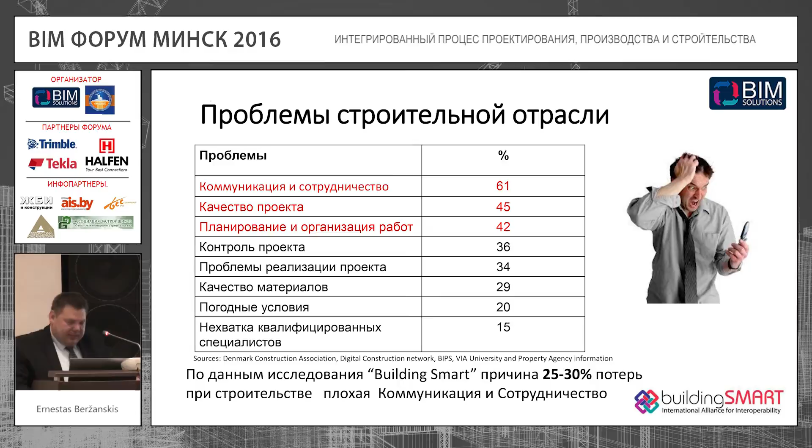If I had more time, I would give you specific examples from our Lithuanian projects. But feel free to think about your own projects when I'm referring to Lithuanian ones - they're not that far apart. So it's about integration of all the projects.

These are the stages we can describe. It's not all over the place, and it's not all over the countries. We're talking about conceptual design, we're talking about design development. So I would like to say this is more or less in line with the Belarusian architectural design, right?

Why is it architectural design? What - no structural engineers work there? They do, and there's a confusing name for it. Electricians, engineers, the heating guys, the MEP engineers - everybody's involved.

In some other methodologies, the next stage is production, or typically a construction phase, according to Belarusian norms - if I'm wrong here, please correct me, I might not know all the details. So it's the construction project, and in parallel we have these gray areas: construction and fabrication, preparation, construction plus fabrication, and we were supposed to start there physically, to start fabrication.

Manufacturing comes hand in hand with the construction process. If you only focus on manufacturing, then I strongly doubt your projects will succeed in terms of planning. We cannot just plan construction works separately without paying attention to the plan of production, fabrication, and delivery logistics. This is all very tightly intertwined, and linking all this together is the key success factor.

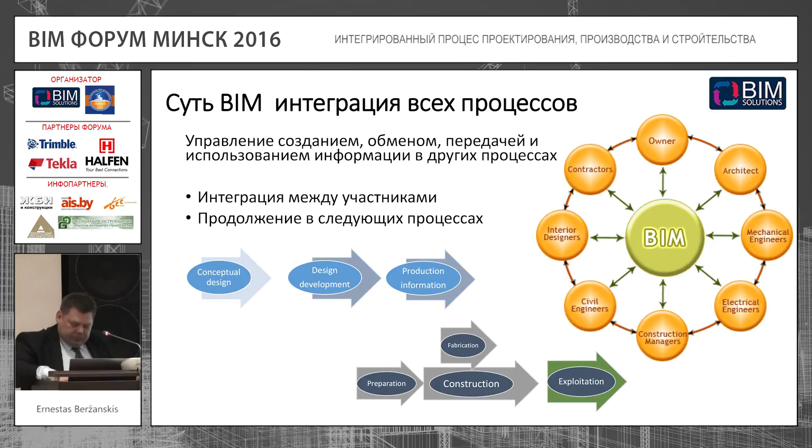This circle, it's like a spiral. It's spiraling throughout this entire process. This is what BIM is about - it's integration between the stakeholders, between the participants of the projects, and further down the process. So this is where we find ourselves.

There are several practical examples we can refer to, both in Latvia, Lithuania, and abroad. I am very much for studying from other people's mistakes, but not our own mistakes. But there are companies in Lithuania that choose to learn from their own mistakes. These lessons are very painful, but very precious at the same time - you will never forget the bad mistake you've made in a long while.

BIM will be successful when there will be architecture around it, and all the engineers, all types of engineers, will be streamlined and working in an integrated environment. BIM is about simultaneous streamlining of workflows. Who is using BIM in more than one design phase? Architectural phase, design - people are using that.

Do you agree that BIM is about streamlining the processes? Yes, you agree. Okay, and what about you? You also agree, right? So that's the definition of BIM in that regard.

First of all, BIM is about saving time, just because we start several processes simultaneously. It's more streamlining, better optimization. Another thing we're aiming at is working in an integrated environment.

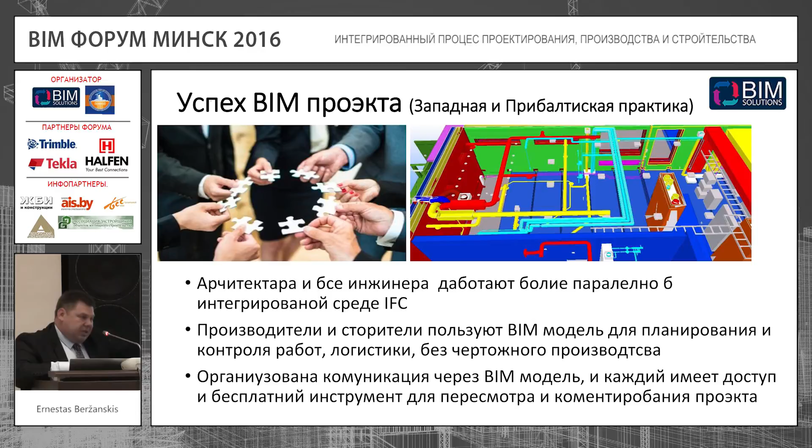We have this major metal structures factory, completely robotized, completely automated. We are considering the stages, how it's all supposed to come together. It's not just about geometry, it's also about the stages. They are sorting the materials, hand-picking the materials for every particular project. Mick will be talking about automation of metal engineering and metal production, and I believe you will be interested in that.

So what else do we talk about when we talk about BIM? The bicycle has already been invented, it's just about upgrading it further, making it even better. The documentation is available in English so far, but I've shown you some standards you can use to bring order to your documentation. Some of you may already know these standards. I will not go into too much detail, it's not a BIM management session. We're talking about manufacturing, but let me draw your attention to some standards used worldwide to streamline work.

One standard I'd like to note is the IFC standard, IFC format, and BCF, BIM Collaboration Format - another standard, this is a new thing. In Europe it's already part of ISO standard, it is now the official standard for BIM. I believe you know what DWG is - DWG is the drawing format. BIM files are IFC files, used to facilitate the exchange of data between various stakeholders in the project or between projects.

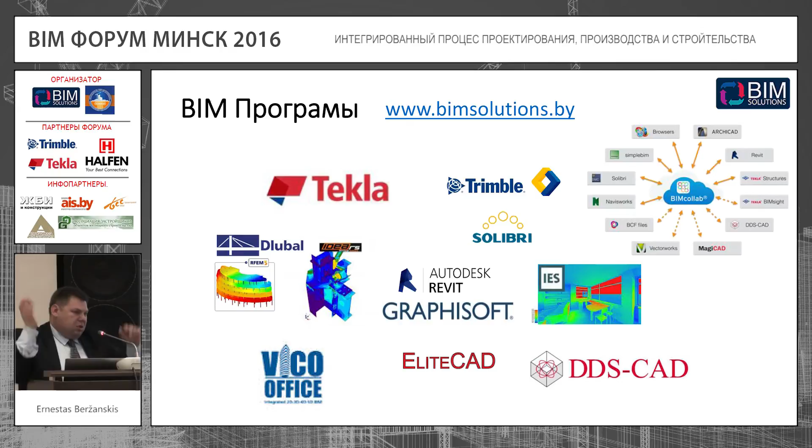We'll introduce you to another condition - this will be Trimble Connect, another presentation, quite a fresh solution. In this case, in technological sense, I believe it's a very advanced solution. So let's move on.

BIM for construction, for construction purposes. Now there are a lot of technologies in the world. We've been debating, discussing - people know what Oracle Primavera is, so it's a good thing. You guys know things because you've wondered about things. I can come up with another RIB iTWO system from Germany for that purpose, to manage construction projects.

This is the biggest general contractors' technology. What I meant by what I just said is that this technology is not used by absolutely everyone so far.

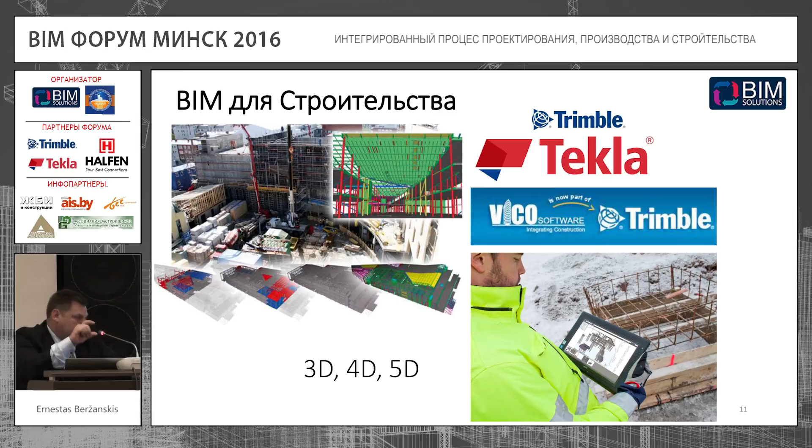4D. What is 4D? It's your 3D model in time, the fourth dimension. So you've modeled this construction site, but it's a living thing. It changes over time, and the construction situation can change. These structural elements, these columns, these pillars you use are living parts of a living organism. So you see that a 4D model can help you check statuses and check quality using that data. The fourth dimension is time, the fifth dimension is cost.

This is the terminology I'm going to use, so please, for those who didn't know, please know what 4D and 5D is about.

This starts from conceptual design, going further to a construction project. It's not exactly a construction project, it's a project understood by constructors. I've seen companies who manufacture this already in this form. This installation level is on the right.

Installation details means that you know at once by looking at it where each piece will fit, up to a single screw, up to a single bolt, up to a single piece. It's the manufacturing level.

So the information is produced, specified, adjusted, and it reaches this final level like I'm showing in this slide. The essence of conveying is about conveying information from stage to stage: detailing, planning the manufacturing, planning the construction, status control, and further along, quality control, and final documentation, or the executive BIM model. We call it the as-built model in English.

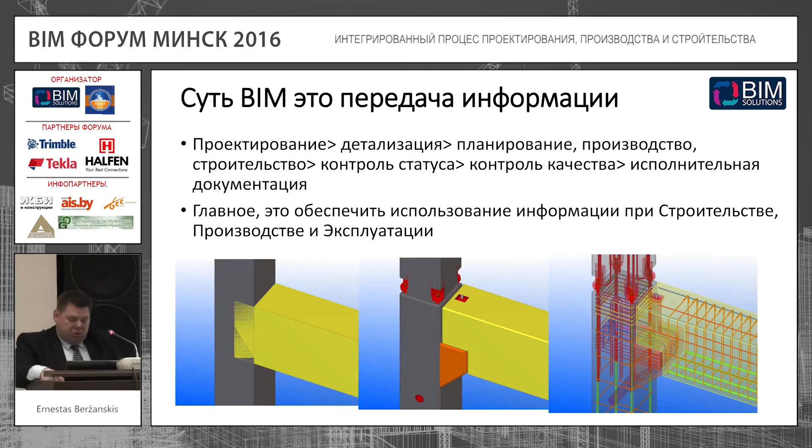So let's consider the construction model. It's much bigger, much wider than the structural model. In construction, we model the construction platform. It changes weekly, so the construction site changes over time. We use this fourth dimension to make sure that this living being is alive.

We're modeling not just these cranes, but also the landscape. We call it landscape in Russian, right? So it's about landscaping, about various pits that you need to excavate. In Scandinavia, there are other things that they design.

This wooden works, it's not exactly scaffolding—well, it's scaffolding, that's the proper name. In Scandinavia, they even model that, when temporary structures need to be built and what materials will be used for it. But the most important thing...

...is this tree of architectural elements, structural elements, engineering elements. You've seen this, right? Everybody working with BIM has already seen this tree. Even if you've worked with AutoCAD, you've seen this tree. But in the construction area, we're not happy with just that. We need more—we need additional criteria for every element in the construction logic.

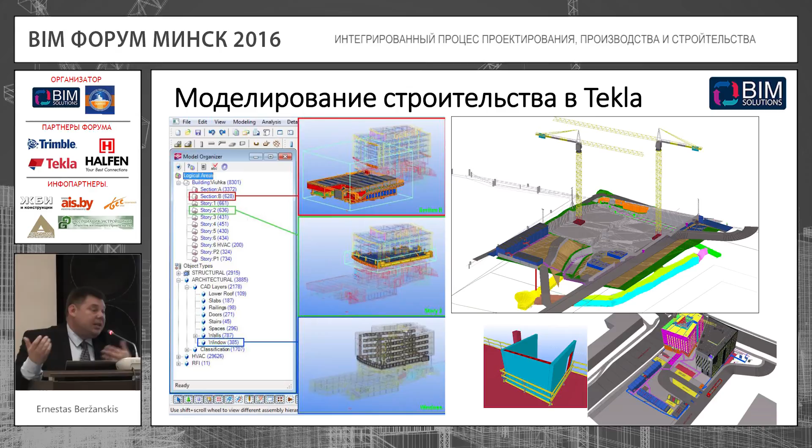What's important is status management. This visualization of layers makes no sense without management. There is a sequential nature of things - they need to come together, they need to be sequenced. We show a video to those who fail to understand the set of drawings. There are sometimes visual aids or visual instructions we have to give, and 4D models help us there.

So planning and control of 4D and 5D. We know that there are file managers, project managers, resource planners, people who manage the workforce. These people know about various levels of planning. Only two of these levels are shown here.

There is a level of very coarse or very rough planning, like this story will be completed by this time, that story by that time. So these are the flow line diagrams. I can show you around this methodology later on.

It's at the level of tasks, at the level of resources. The most important thing are tasks. It's about the foundation - for example, you need to build the foundation and balance the resources. Each of these lines is a task.

Who of you is working with Microsoft Project? One, two, three - so some people have worked with Microsoft Project. So this is the way it is described in Microsoft Project.

So the more inclined this line is, the more sloped it is, the longer it takes to complete it. And the more upright this line on the chart is, the shorter time span it takes to complete it.

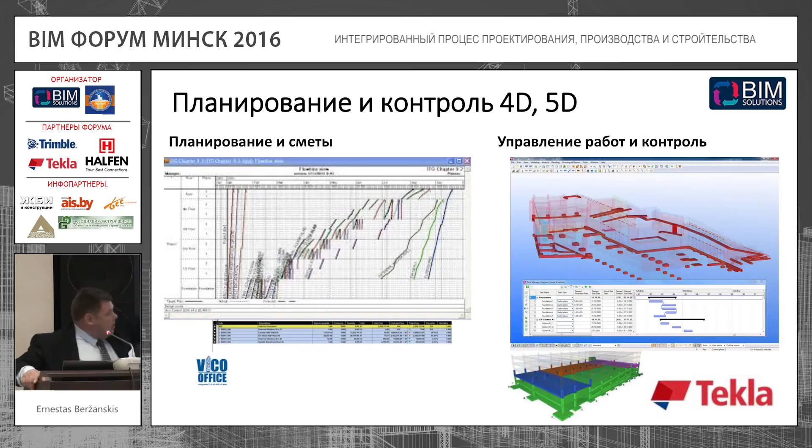Then we receive this information, for example, at the central office. So think of it as a local picture, and the one that goes into the central office is on the right. You will hear about this today.

Task management, how it looks like. So some more words about this methodology - it's about the arrangement of workflows.

There are several zones that you can see here: building 1, building 2, first floor, second floor, first story, second story, and so on. So to avoid this overlapping, it's useful to visualize it like this.

When we're talking about status control, it's for each element individually. I don't know whether 'element' is the right word to use in Russian here, but anyway, the structural element - it's the right word, right? It's the column, it's okay to use this word.

So if you remember, we talked about one thing - that the model is integrated in this graph, and they are connected. So I, as a column, I know when I'm supposed to be manufactured. These are the deadlines right there. These attributes are right there.

And at the construction phase, the construction site, when this column, or me, is installed, I will change my status when my code has been scanned. So the column has already been put there, has already been installed. And this information, this small piece of data, this status update, will go further down to the system.

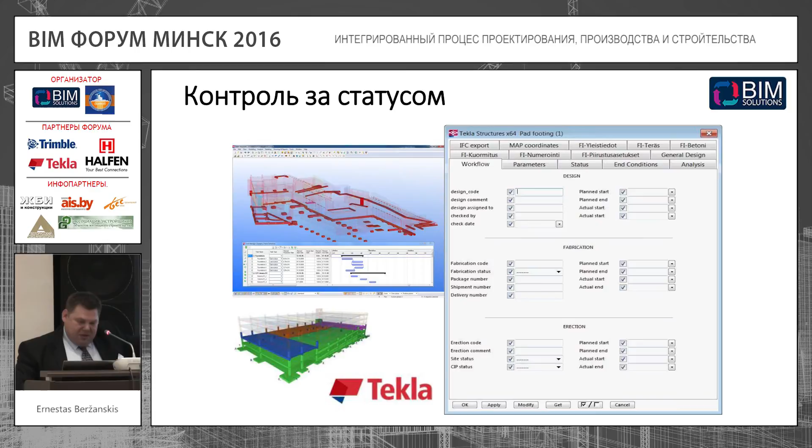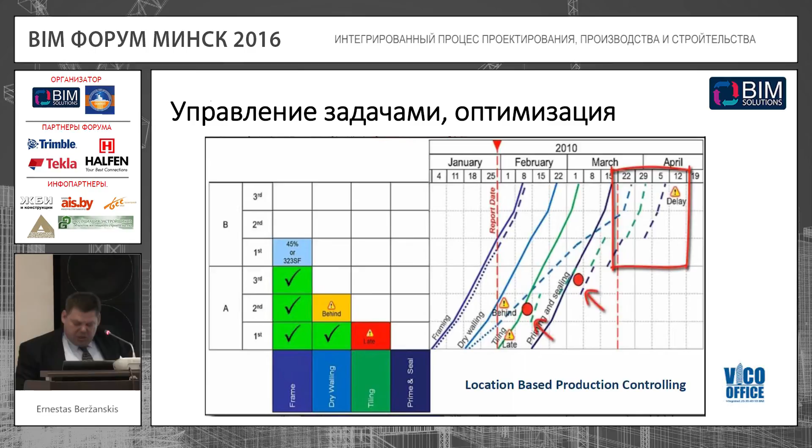And these points are the facts. The major dots, the major points, are something that's where we are going to be at a specific point in time. This is about resources. When some working team is working slowly, then we can respond to that. We can get them to work faster if we need them to.

So, BIM in manufacturing, or BIM in fabrication - it's not just about integration of machines into planning and manufacturing.

When each column knows when it's supposed to be produced, I can use this XML, DSTV format, or another compatible format. I can take this to MIS systems. MIS stands for Manufacturing Information System. I can use this with the metal factory I gave as an example, that factory knows models.

They know every status in a model, and they know how to streamline their production accordingly. The barcodes are used in order to scan the parts or pieces that have arrived or left the manufacturing. So it's about continuous monitoring, continuous feedback. It's not just plain geometry, it's much more than that.

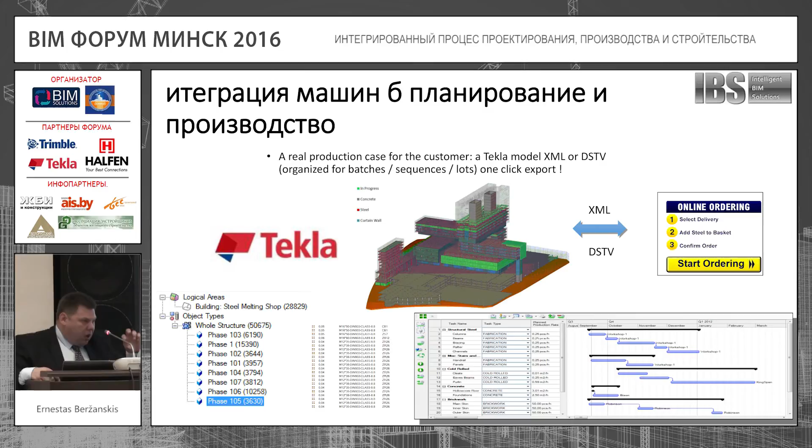So how does this happen? For example, there is an architectural model. People send it from AutoCAD, and they communicate through IFC format between each other. At some point we involve the manufacturer, and the manufacturer says, no, guys, it doesn't play like this here, it won't be the same as portrayed here, it will be somewhat different. Then this is the opportunity for us to adjust the picture, to arrange it, to agree on a common vision between us.

And these pieces will be manufactured by that producer, by that fabricator, not by the drawings, but by the models, by the files. Reinforced concrete production systems, modern ones, look like this, and they can already do that if this technology is implemented.

The principle is this: BIM is about the usage of data, the usage of this information. It's something that we try to communicate through drawings if we cannot use BIM. Sometimes the machine, the equipment, cannot work with drawings. They need the models, and they need these files. And this is something that we can do now, these days, in Latvia.

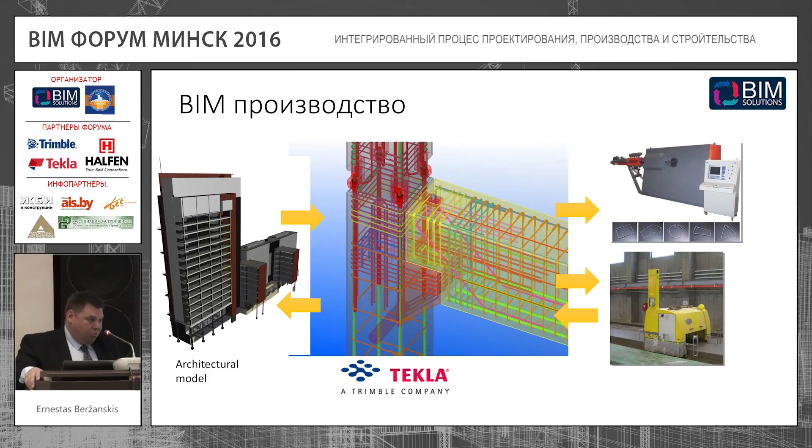We're not that far advanced in Latvia. We are European Union, but not that far advanced. In the Nordic countries, there are welding robots at work. We're not at that phase yet.

So you can see this model of metal, this design, this structure. We design reality, real-life pictures. And this is what the machinery, or this BIM model, this is what the machinery visualizes. This is the image they get in their electronic mind when they get this file uploaded.

So this is about putting these elements together. It's an assembly line. The assembly line is the output. We'll talk about that later.

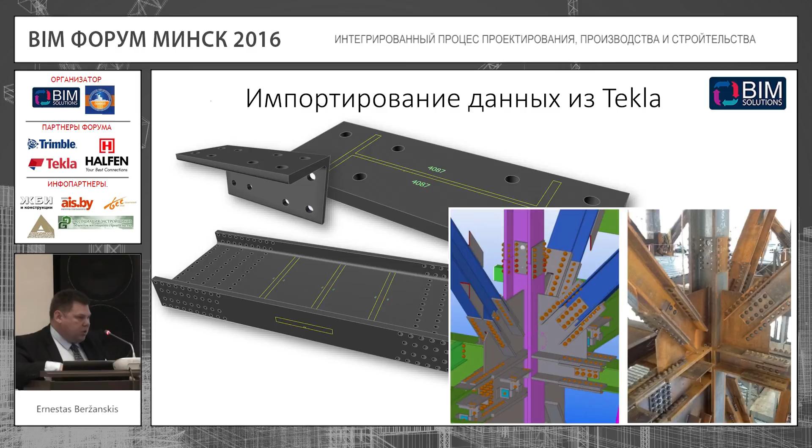Then we approach the construction site management level, story by story, floor by floor. This is a living organism, so it matters a lot to properly manage it. This is the very same construction site.

So one week we plan that this corner of the construction site will be occupied by building materials. The next day it will be used to store these structural elements, metal structures. So this is about managing the moving things that otherwise would have been mismanaged. We foresee the logistics, otherwise we would spend 30% more time to move things around. And it's not necessary to move these things at all times.

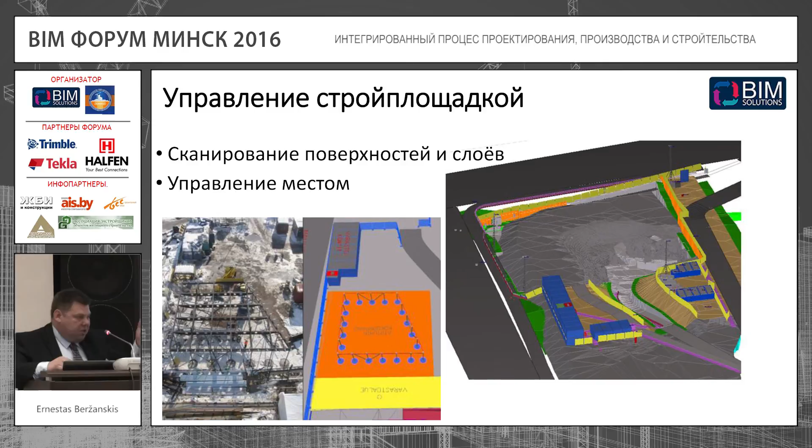For example, we put the construction materials in one corner and then we find out immediately that this corner is supposed to be used for something else. We can avoid that. This is what coordination is about.

So there are these booths or construction wagons, these temporary structures. These are the smart boards that show the visual statuses, when everything should be done. The displays are used for various more complicated nodes. These 3D visualizations are used.

So using 3D in manufacturing is already a big thing. It's already a big way to reduce miscommunication, or to avoid miscommunication. The simulation in 4D means that the fourth dimension of time is taken into account. There is accountability for quantities, accountability for statuses, everything.

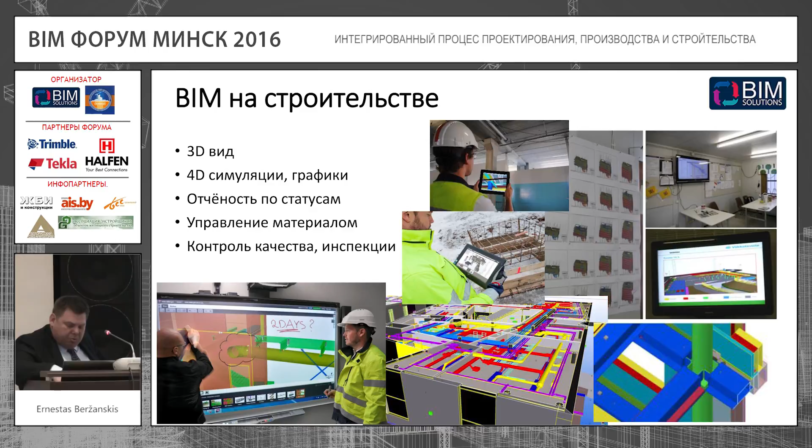To wrap up my presentation, I would like to show this on-site control. So we send control points from our model to the construction site. How do you properly call it in Russian? This geodesic instrument.

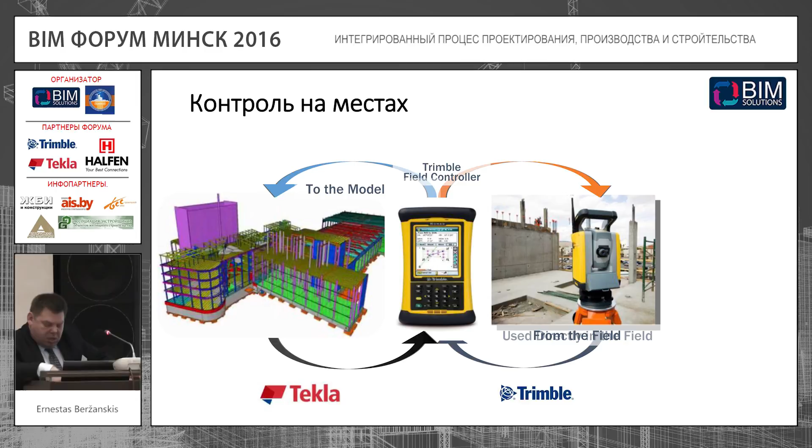So these devices, this surveying equipment, helps us study the reality. We specify specific points that we need to check, whose status we need to check, to see how we're doing well on time in the project.

So for example, here we specify specific points and they are surveyed on site. As a result, we get some feedback from these surveying instruments, from these geodesic instruments, and we can upload it back to the model. In the model we can see the deviations if there are any. It's a good thing if this is temporary construction.

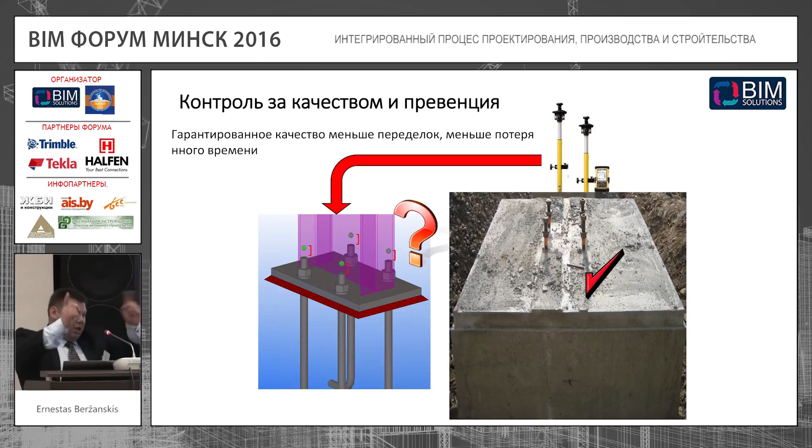It's a good thing if it's false work, but what if it's not? We need to prevent any issues with quality. When we are at the stage of decking, doing false work in concrete, this is about quality management and prevention of issues quality-wise.

What's the situation in Lithuania and Latvia? It's closer to our area, right? In Lithuania, BIM is used by PST, one of the major construction companies. Nobody was forcing them to move into BIM. They have done it for themselves, and they orient all the contractors to work within this BIM environment. They are already doing 4D with their contractors.

YIT is a company famous in the Nordic countries. Consolis - you may have heard about this. It's assembled reinforced concrete console.

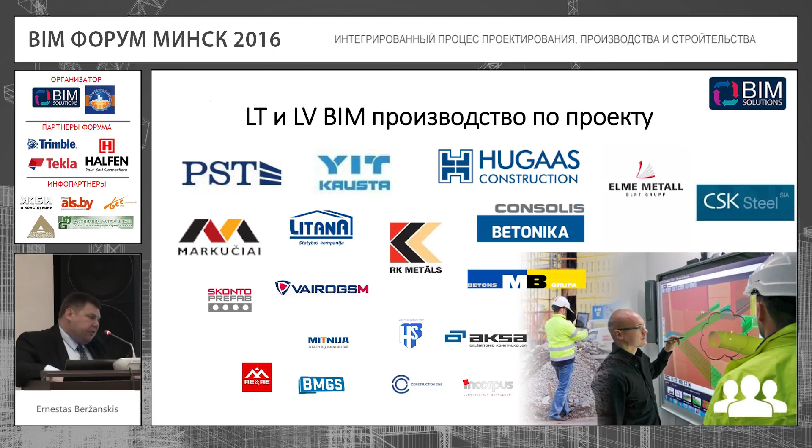Markučiai will represent their working methodologies. They are the strongest - we have two major companies that I can point out: Markučiai and MB Grupa. These are not the designers, these are fabricators and constructors. So of course, some of them have their own designers, and some of them work or cooperate with designing companies.

Who of you does not have internet access at all? Everybody has internet access, right? So thank God we're there. Just log into this website. BIMforum.lt means Lithuanian, BIMforum.lv means you go to the Latvian guys, and BIMforum.by - you go to this conference without video recording, without videos uploaded.

But in some weeks we will upload the video. At each conference we are doing videos. Those who have been absent from the conference will be able to watch the video.

So you can check out this Open BIM Awards. You will not understand the Lithuanian because the website is in Lithuanian, but you will understand the videos, and the videos show the models, which are pretty self-explanatory regardless of the language. All these models will be sent to you electronically if you want - it's better to look at the PDF than a picture or photograph.